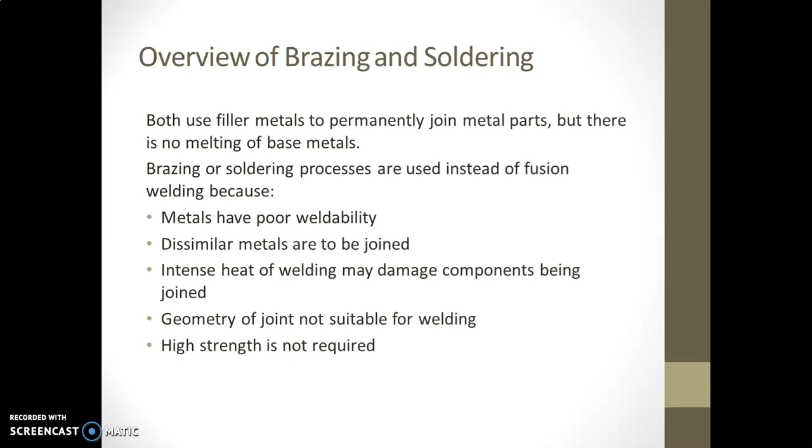Generally, brazing is a joining process in which filler metal is placed between the mating surfaces to be joined, and the temperature is raised sufficiently to melt the filler metal, but not the components, as would be the case in fusion welding. So, brazing is a liquid-solid-state bonding process. Upon cooling and solidification of the filler metal, a strong joint is obtained.

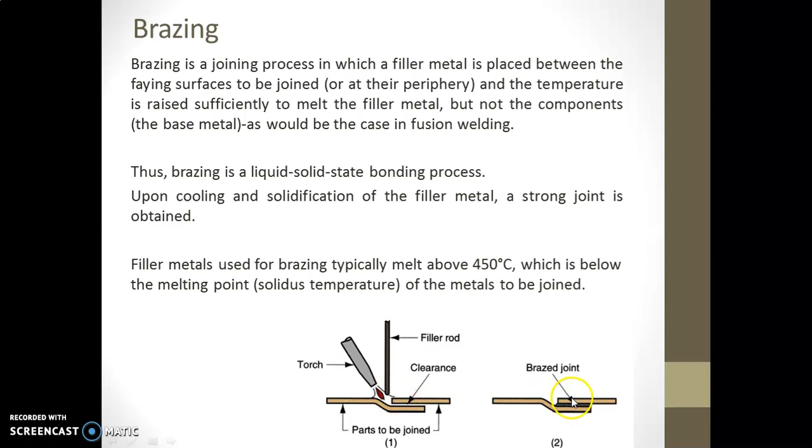So after using the filler rod, this kind of joint is developed here. So this is a brazed joint. So some of the brazing methods are here. So first is torch

This is performed first by heating the joint with the torch and then depositing the brazing rod or wire in the joint. Generally, thickness is in the range of 0.25 to 6 mm. So next is furnace brazing. In furnace brazing, induction kind of furnaces can be used.

The parts are pre-cleaned and preloaded with the brazing metal in appropriate configuration and then placed in the furnace. The whole assembly is heated uniformly in the furnace. Furnaces may be batch type for complex shapes or continuous type for high production runs, especially for small parts with

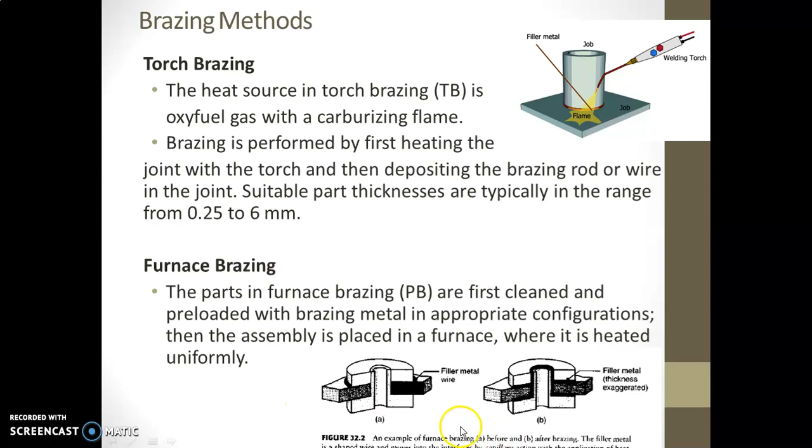simple joint designs. Vacuum furnaces are used for metals that react with the environment, such as stainless steels, where the passivation layer of chromium oxide can compromise weld strength. So this first diagram is before, and this is after, where filler metal joins the components. So this is an example of furnace brazing, and now we will discuss induction brazing.

Next we will discuss resistance brazing, which can be represented by RB. Here the source of heat is the resistance of the components to be brazed. Electrodes are used for this purpose, as in resistance welding. Parts are either preloaded with filler metal or filler metal is supplied externally during brazing. The thickness in case of resistance brazing is 0.1 to 12 mm.

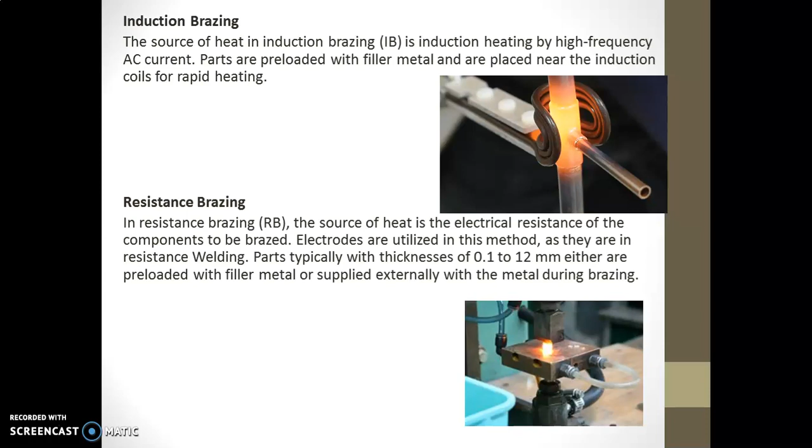Dip brazing means dipping the assemblies to be brazed into either a molten filler metal bath or a molten salt bath at a temperature just above the melting point of the filler metal, which serves as the heat source. All workpiece surfaces are then coated with the filler metal.

Dip brazing in metal baths is used only for small parts, such as fittings, usually less than 5 mm thick. Molten salt baths, which also act as fluxes, are used for complex assemblies of parts with various thicknesses. Generally, 1,000 joints can be made at one time by dipping in the molten salt bath or molten filler material.

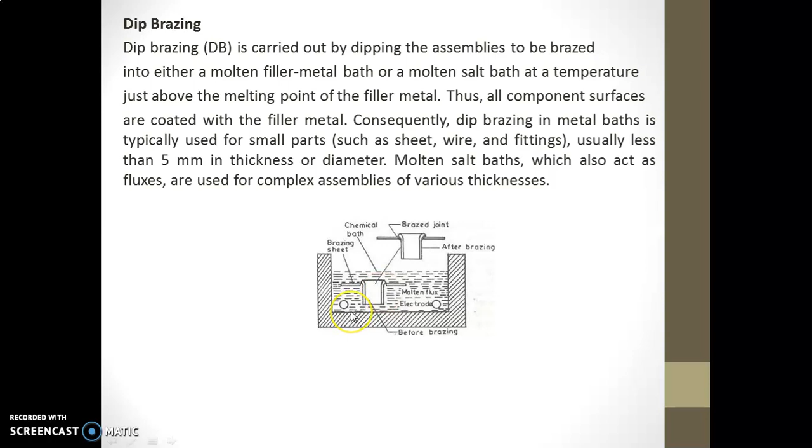Next is infrared brazing, represented by IRB. This process is particularly suitable for brazing very thin components, usually less than 1 mm thickness, including honeycomb structures. Now the radiant energy of the lamp is focused on the joint, and the process can be carried out in vacuum. Microwave heating may also be used.

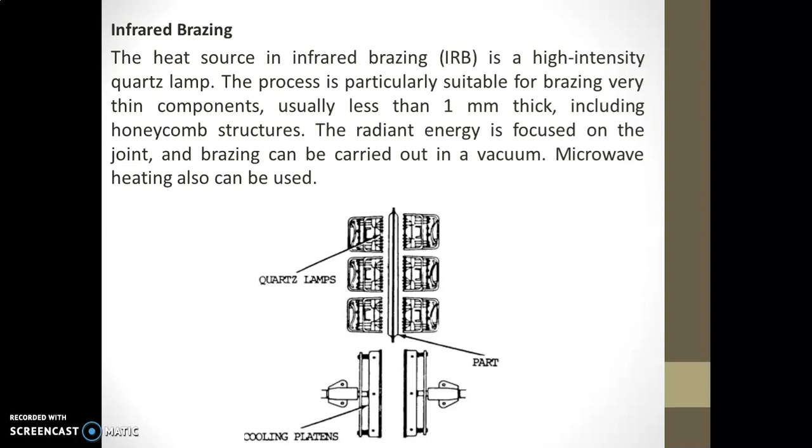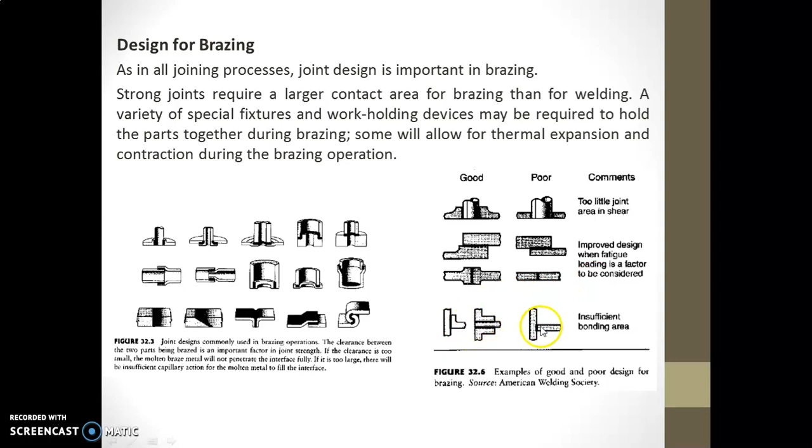In this condition, an improved design when fatigue loading is a factor to be considered. And here this is a good design, this is a poor design. The bonding area is lesser in the poor design.

Now let's compare brazing with welding. Any metal can be joined, including dissimilar metals. It can be performed quickly and consistently, permitting high production rates. Multiple joints can be brazed simultaneously. Heat and power requirement is lesser than fusion welding.

Problems with the heat affected zone in the base metal are reduced, and joint areas that are inaccessible by many welding processes can be brazed. Capillary action draws molten filler metal into the joint.

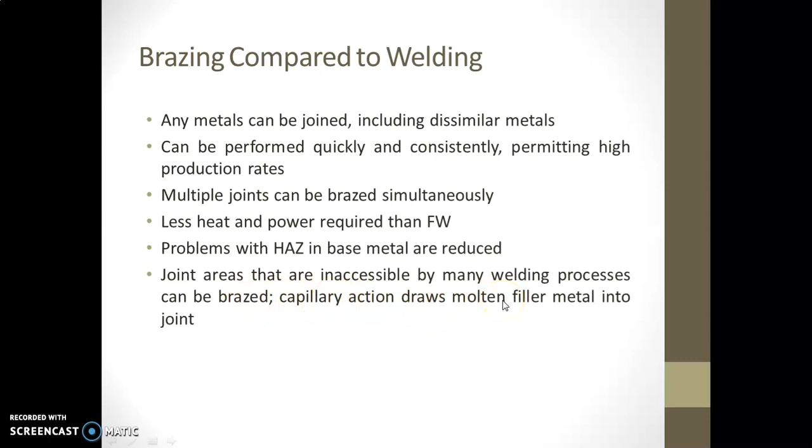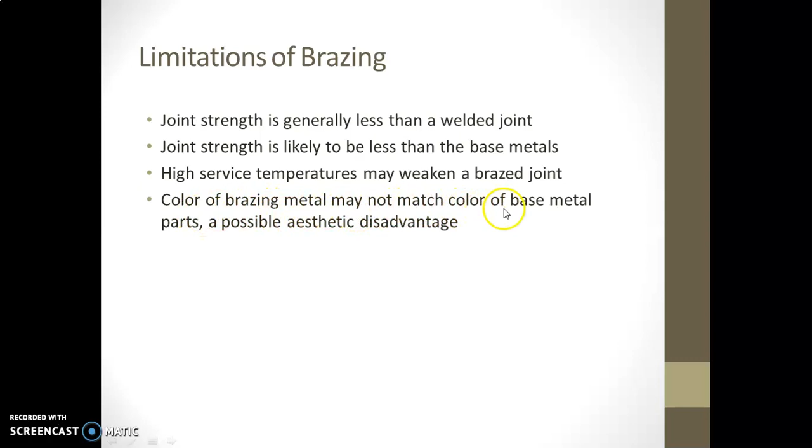So these are some of the drawbacks of brazing. Joint strength is generally less than a welded joint. Joint strength is likely to be less than the base metal. High service temperature may weaken a brazed joint, and the color of the brazing metal may not match the color of the base metal parts. Possible aesthetic disadvantage.

These are some of the applications: in automotive, joining tubes and pipes; in electrical equipment, joining wires and cables; in cutting tools, brazing cemented carbide inserts to shanks; jewelry applications; the chemical process industry; plumbing and heating contractors join metal pipes and tubes by brazing; repair and maintenance work.

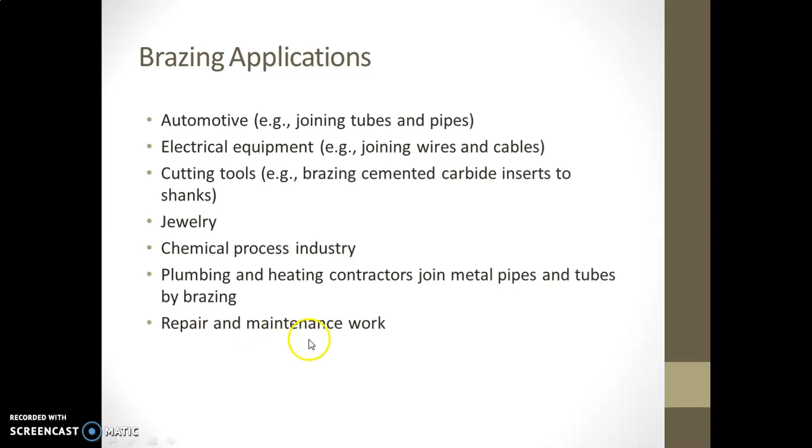Now we'll discuss soldering. Soldering is a similar technique to brazing, but here the filler metal is called solder, which melts at a relatively low temperature. As in brazing, the solder fills the joint by capillary action between closely fitting components. Two important characteristics of solders are low surface tension and high wetting capability.

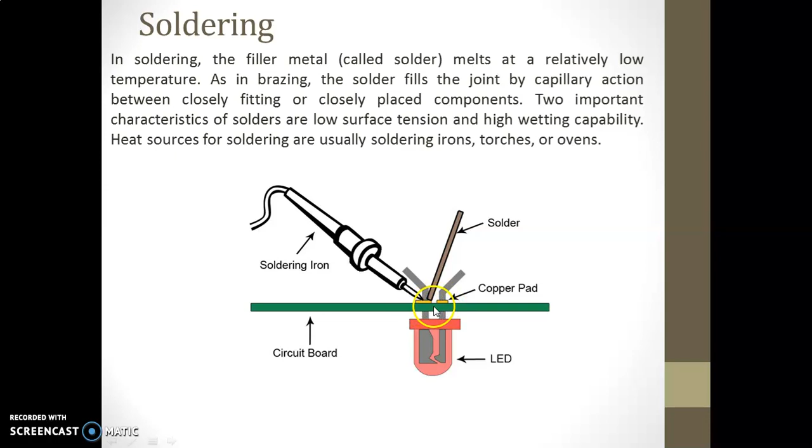Generally, heat sources for soldering are soldering irons, torches, or ovens. Here is the schematic: the soldering iron provides the temperature along with the filler material, that is solder. This is the copper pad, and the soldering iron is used to raise the temperature. The solder melts and joins the materials.

So types of solders and fluxes. The solder metal melts at a temperature that is the eutectic point of the solder alloy. One example is a solder with 62% tin and 38% lead, which melts at 188 degrees Celsius, whereas tin melts at 232 degrees Celsius and lead at 327 degrees Celsius. These are some of the types of solders along with their applications.

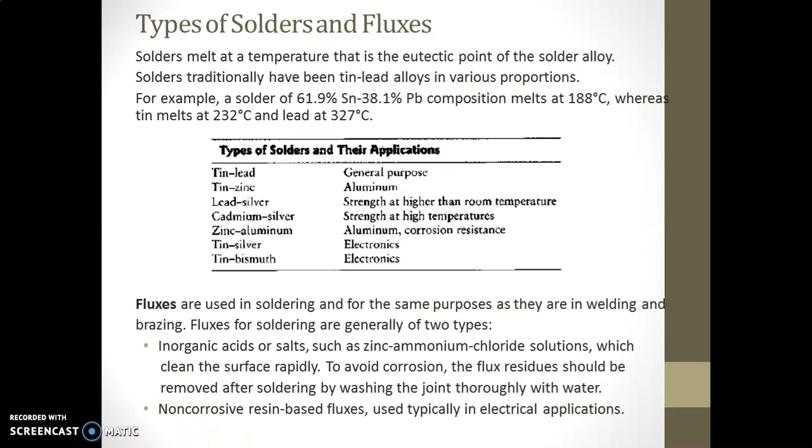I'll discuss solderability of some materials. Solderability is like weldability; it is the ability to get soldered. Different materials have different abilities of getting soldered. Copper, silver, and gold are easy to solder. Iron and nickel are more difficult to solder. Aluminium and stainless steel are difficult to solder because of their thin, strong oxide films.

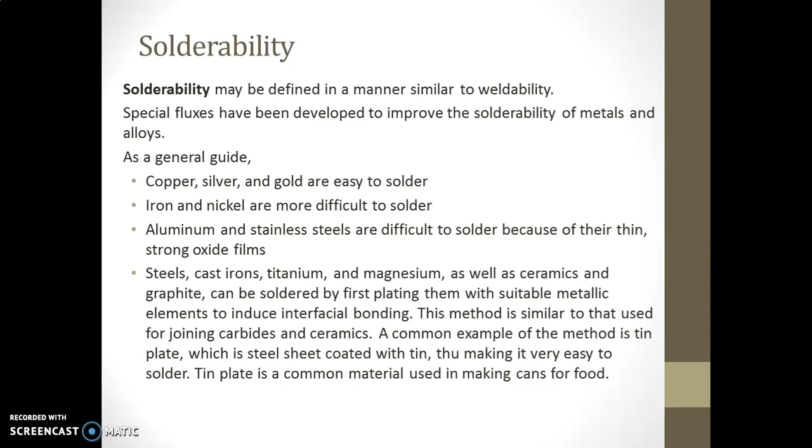Steels, cast irons, titanium and magnesium, as well as ceramics and graphite, can be soldered by first plating them with suitable metallic elements to induce interfacial bonding. A common example is tin plate, which is steel sheet coated with tin, making it very easy to solder. Tin plate is a common material used in making cans for food.

These are the soldering applications, with various pictures showing joints developed by solders. The general guidelines are that soldering temperatures are relatively low, so a soldered joint has very limited utility at elevated temperature. Moreover, since solders generally do not have much strength, the process cannot be used for load bearing members.

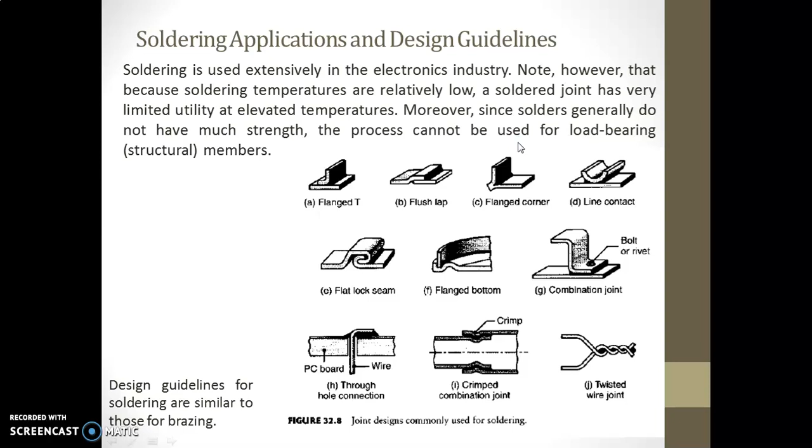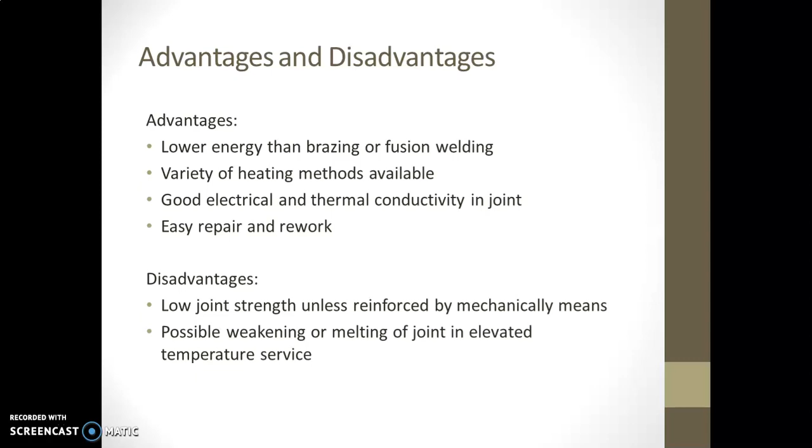These are the advantages: lower energy than brazing, a variety of heating methods available, good electrical and thermal conductivity in the joint, easy repair and rework. Disadvantages are low joint strength, and possible weakening and melting of the joint at elevated temperature.